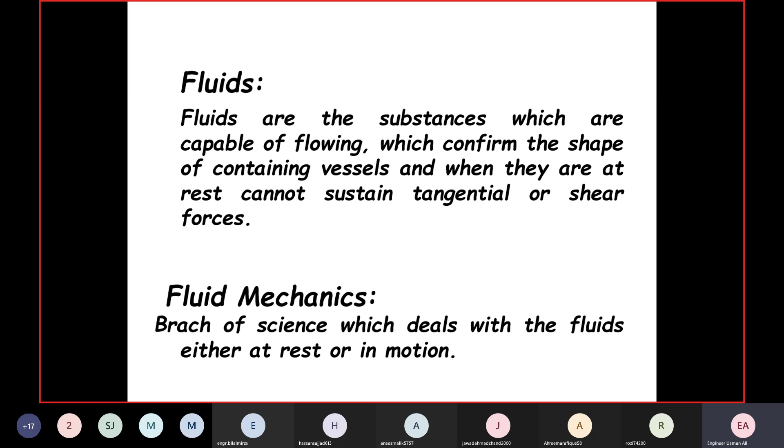As far as the textbooks and reference books are concerned, as far as my part is concerned, I will let you know later what I have to cover. The other teacher with me will be Engineer Vaiza. She will obviously introduce herself during the lab classes and also during the lectures. So one half of the course will be covered by me, and the other half will be covered by Engineer Vaiza.

As far as my course is concerned, I will be taking most of the contents from the first book, that is Fluid Mechanics with Engineering Application by Daugherty, and it's a metric edition you should get. The latest one is preferable. All of you should have this book preferably, and it is a very useful book, especially relating to fluid mechanics and hydraulics. It will also help you in hydraulics in your next semester course.

So if you get this, we also have to do some numericals from different chapters. That's why we need to have this book with you so that you can go through the solved examples given, and accordingly you can do the numericals that will be assigned to you, and that will be done also in the class.

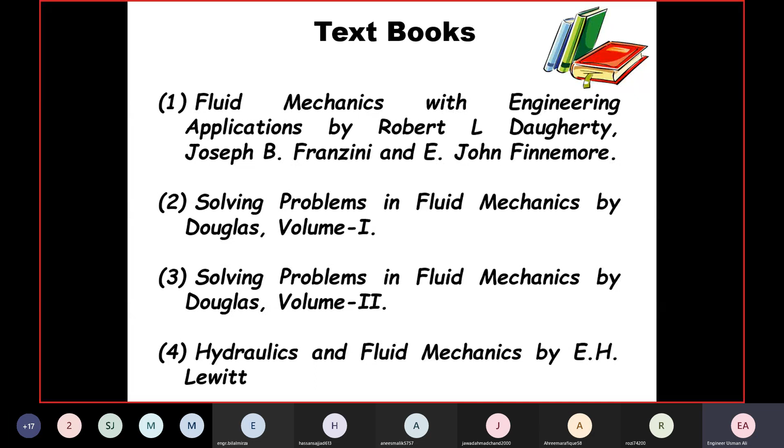For the other half, which will be taught by Engineer Vaiza, she will be having the material of the lectures from Fluid Mechanics by Douglas, Fluid Mechanics volume 1 and 2, and by Lewitt.

Now, as far as the marks distribution is concerned, you already know it. The total marks of the subject are 200, 100 for the theory part and 100 for the lab subject, that is fluid mechanics lab.

So as far as the theory part is concerned, these 100 marks are divided into quiz 1 of 10 marks. There will be a midterm of 30 marks.

Hopefully, if the conditions improve, and obviously you know that the university has the intentions to take the on-campus exam. So hopefully, if the condition improves, we will have the midterm on time. Otherwise, you may have one exam later as a comprehensive exam.

Anyhow, so typically we have the quiz 1, midterm, quiz 2, end term, and the class participation, which will include the assignments which will be given to you, and also your class attendance, etc.

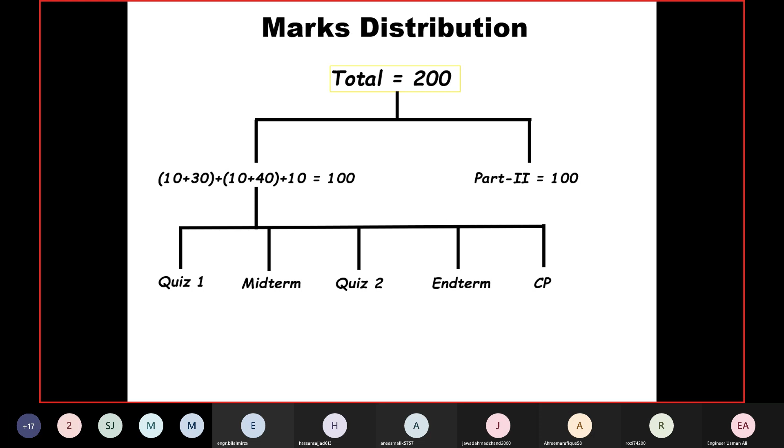Now, coming to the course contents that we have to cover in this subject. The first 4 topics will be covered by me, and out of them, few topics will be before the mids and few will be after the mids.

So the first topic is steady uniform flow of incompressible fluids through circular pipes. These are also the chapters of the Daugherty book. The first topic is chapter number 8 of the Daugherty book, so mostly the contents will be from that chapter: steady uniform flow of incompressible fluids through circular pipes.

We will discuss this topic after the mids because it is more, you can say, conceptual. So I want that if hopefully on-campus classes start, that will benefit you more.

Anyhow, then we have forces on immersed bodies. That's again a chapter of the Daugherty book, chapter number 10, dealing with forces on immersed bodies. Immersed bodies mean those objects or bodies which are fully submerged in a fluid, like an aeroplane's movement in air. That is one example of it. Similarly, you can have other examples of the same nature.

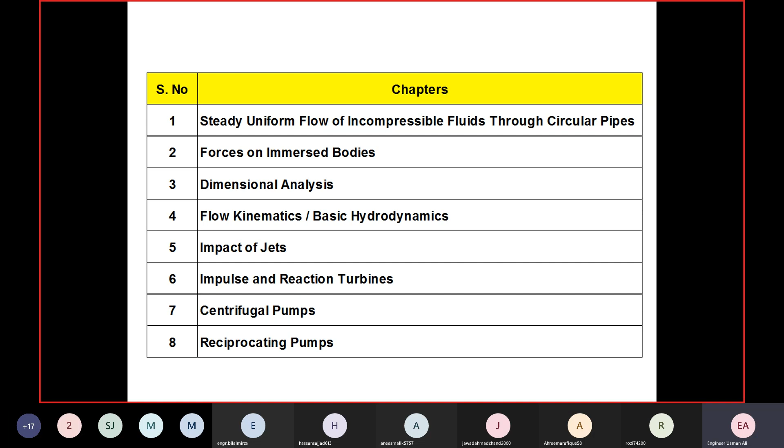And then we have the other topics that will be covered by engineer Vaiza, that is impact of jet, impulse and reaction turbines, centrifugal pump, reciprocating pumps. That will be contributing to CLO4, to evaluate the design of various types of turbines and pumps using impulse momentum principle.

So this CLO4 is one which will come from one half of this course work of FM2. It's relating to PLO4, that is investigation, and its cognitive level is C5, quite a high cognitive level.

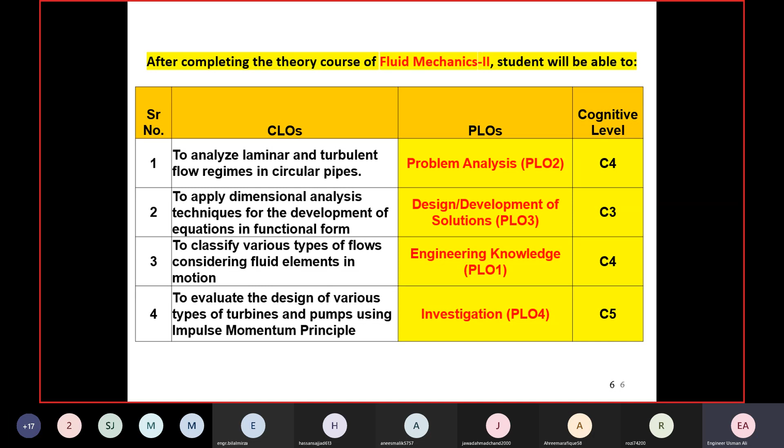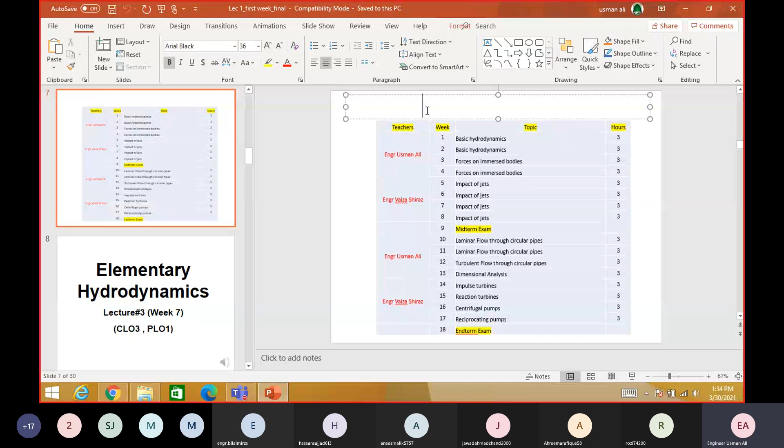This is the tentative lecture delivery plan for this subject. So as I mentioned, I will start with the lectures, and engineer Vaiza will take care of the lab classes for the first 4 weeks, and then it will be reversed. So for all sections in the first 4 weeks, the theory lecture will be taken by me.

So I'll be covering the topics basic hydrodynamics and forces on immersed bodies before mid. And then from the 5th week onward, engineer Vaiza will take over the theory classes, and she will cover the impact of jet topic. And then there will be the midterm exam, hopefully if conditions prevail, become better and allow.

Then after the mids, again I will take care of the theory classes for all sections and cover the remaining part of the course that I had to cover.

And then in the later part of this semester, from week 14 onward, engineer Vaiza will take care of the theory classes, and I will be taking care of the lab classes. So this is how this course of fluid mechanics will go in this semester, including the theory and the labs.

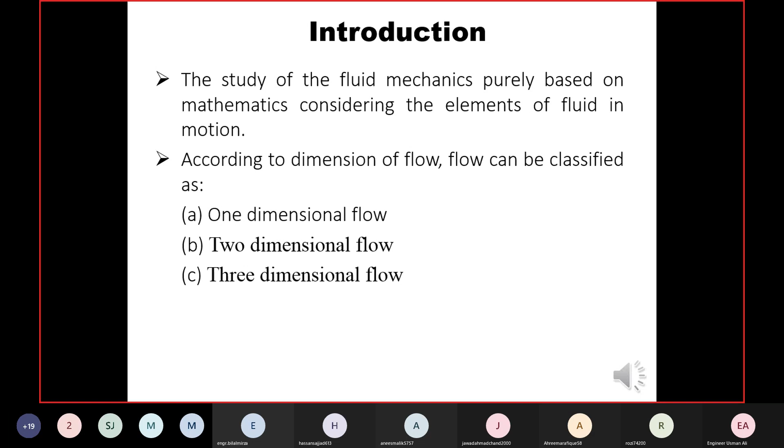So let us see what is one-dimensional flow, two-dimensional flow, or three-dimensional flow. In one-dimensional flow, all the streamlines are parallel to each other, so there is only one velocity vector which is in the direction of flow. In other words, in one-dimensional flow, we take the variation of velocity with respect to one dimension, normally along the direction of flow.

Remember this practically - if you talk about reality or in real terms, no flow is one dimensional. If you talk about flow in a channel, flow in a pipeline, or flow over a weir or spillway, or over a notch, in reality, velocity of flow will change along the direction of flow, along the width of channel or along the diameter of pipe, and it will change along the other axis as well. So in reality, all flows are three-dimensional, but three-dimensional flows are more complex to analyze, and that's why wherever the situation allows us to simplify the flow type from three-dimensional to one-dimensional or two-dimensional to one-dimensional, that is always preferable.

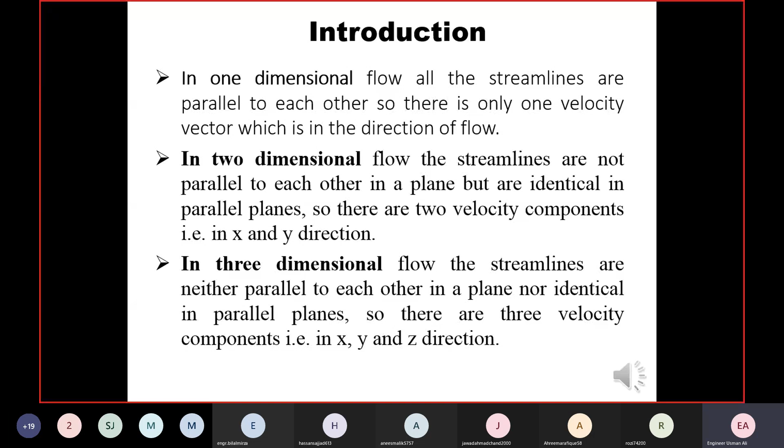Now coming to a very important topic under basic hydrodynamics, that is the differential equation of continuity. Up till now you know the continuity equation A1 V1 equals A2 V2, which is the simplest form — the one-dimensional continuity equation. But here you will learn the differential form of the equation, using differential variables, partial differential equations, in three-dimensional and two-dimensional form.

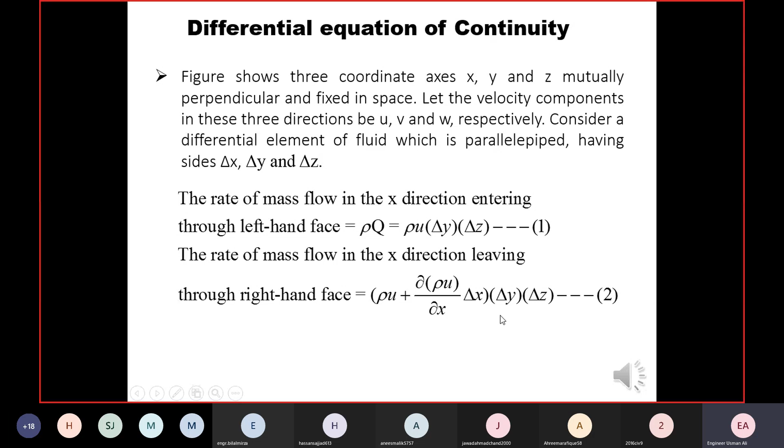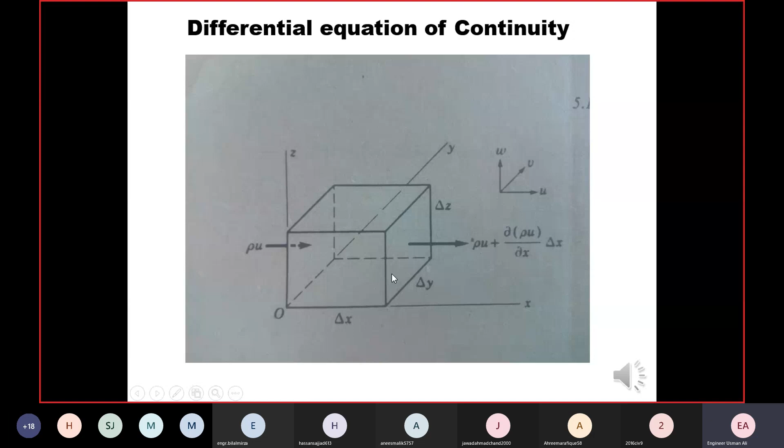And this is again the area of this face, which is normal to the direction of flow of the fluid. So again, the area of the right hand face is delta y into delta z. So this is how we can write the mass flow rate entering along the x-axis from the left hand face, and the mass flow rate leaving the right hand face along the x direction.

Now next is the net rate of mass flow in the x direction. So we have the mass flow rate entering along the x direction and the mass flow rate leaving along the x direction. Net will be mass flow rate entering minus mass flow rate leaving along the x direction. So net mass rate of flow will be inflow minus outflow.

So rho u delta y delta z minus, you can multiply this rho u with delta y delta z, so this will be minus rho u delta y delta z. And again you can multiply delta y into delta z with the second term in the bracket, that is minus partial rho u over partial x into delta x into delta y into delta z. As you can see, the first term rho u delta y delta z and this rho u delta y will be cancelled. So the net mass flow rate along x direction will be minus partial rho u over partial x into delta x into delta y into delta z.

So this is equation number 3, which is the net mass flow rate in x direction.

Now on the same lines, we can write the equation for net mass flow rate in y direction. The only thing that will change is the velocity component, in x direction it is u, and instead in y direction it will be v. And now the variation of the velocity component along y direction is with respect to partial y instead of partial x. Looking at equation number 3, the net mass flow rate in x direction, partial rho u is the velocity component along x direction and partial x is the distance along x direction. This is the volume of the element that is common for all other net mass flow rates in other directions.

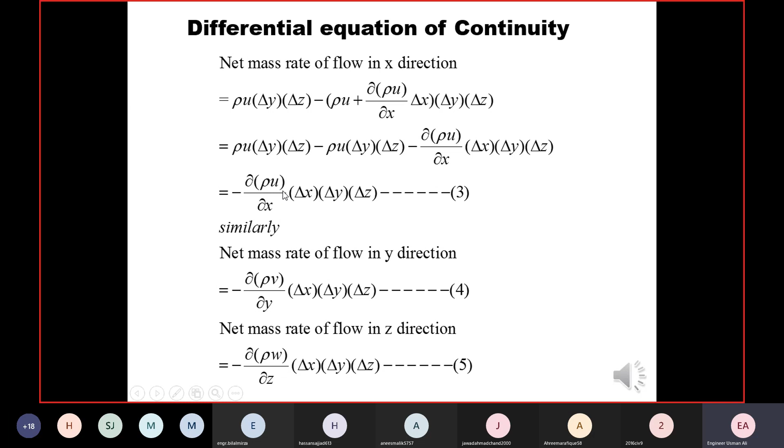So delta x, delta y, delta z will be common, multiplying this volume of the element. If you add these three equations, 3, 4, and 5, you see delta x into delta y into delta z is a common term. So this will be taken out with the negative sign.

And the remaining will be inside the brackets: partial rho u over partial x plus partial rho v over partial y plus partial rho w over partial z. So this is equation number 6, the net mass flow rate in three mutually perpendicular directions x, y, and z.

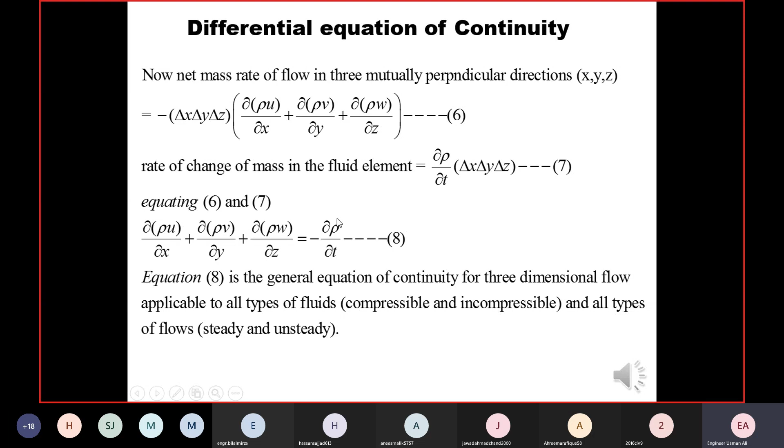So for steady flow, the right hand side of the equation will be 0, because partial rho over partial t is 0, no change in velocity or density with respect to time. Putting this in equation number 8, we get equation number 9: partial rho u over partial x plus partial rho v over partial y plus partial rho w over partial z is equal to 0. This is equation number 9, the three-dimensional continuity equation for steady flow.

Now another thing we can consider is the incompressible fluid. As I mentioned, in this course mostly we will be dealing with incompressible fluids. For incompressible fluids, the density must be same in x, y, and z direction. There is no change in the density of the fluid for incompressible fluids. So putting this in equation number 9, we can take the density factor out, because it is not changing with x, y, and z.

So we can write rho into partial u over partial x plus rho into partial v over partial y plus rho into partial w over partial z. We take rho common, which is constant, and on the other side it remains 0. So taking rho constant for incompressible fluids, this becomes equation number 10: the three-dimensional continuity equation for steady incompressible fluids.

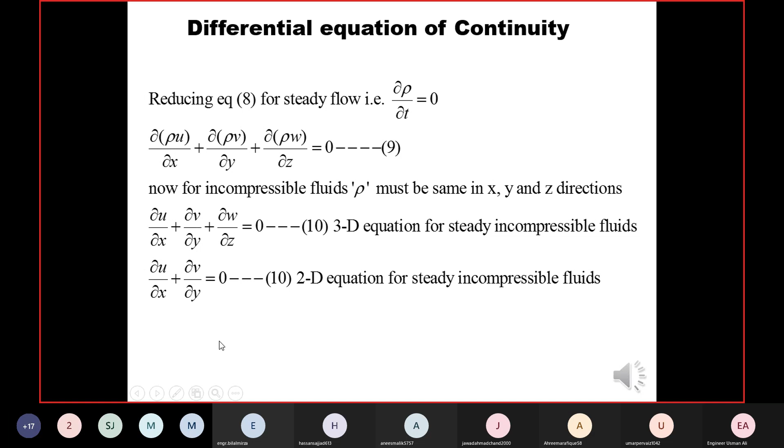So these are the two equations that we should specially keep in mind whenever you are asked to check the flow field regarding continuity. You will be utilizing equation number 10 and equation number 10a. Now let us use these equations and see where they are to be used to check the continuity of the flow field.

So flow field is actually the way to define or describe the velocity variation in the flow, that is the flow field. It is the way to define flow phenomena, considering dimensions and variation of velocity in different dimensions. So it can be a two-dimensional flow field or three-dimensional flow field, depending on the components of velocity which are given.

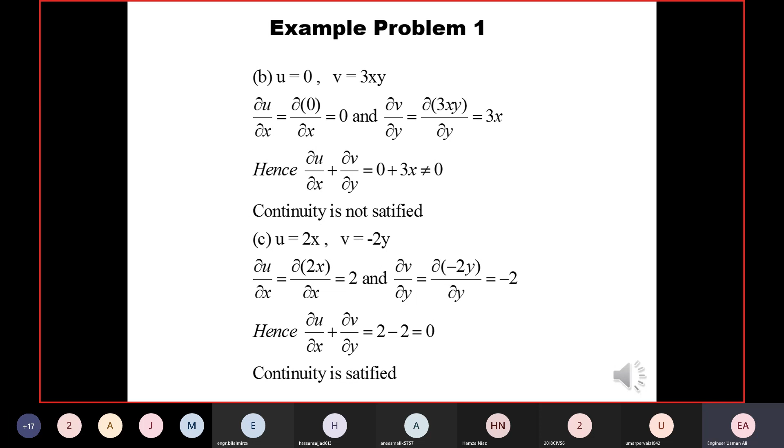So this is how we can check the continuity of the flow field. So this third flow field has also satisfied the continuity equation. It means the fluid is continuous, or continuity is satisfied. So this is how we can check the continuity of different flow fields, whether two-dimensional or three-dimensional.

So in this way you can try at your places with different equations, for example u is 2xy and v is 3x. Similarly, you can take some values of u and v and try at your places, how we can check this continuity for different flow fields.